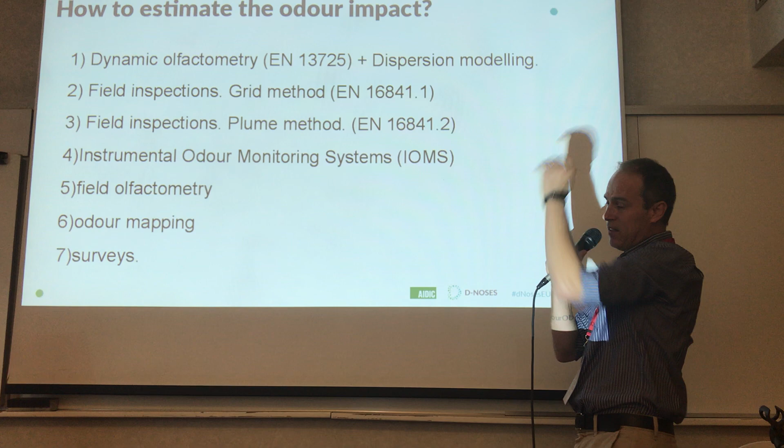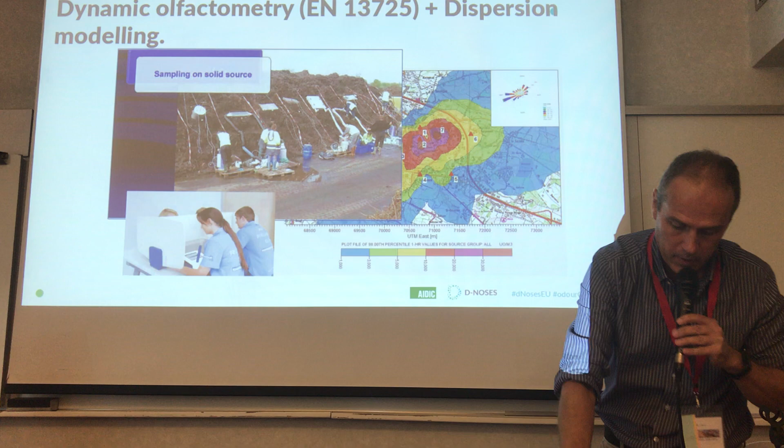Okay, so how to estimate the odour impact? We have seen this already explained by Laura and Andrea. So the first method is dynamic olfactometry coupled with dispersion modeling. You take a sample, you analyze it, and then you calculate the impact with dispersion modeling. This method is the most used.

It's repeatable, reproducible, but it has two things. It has a few more things, but I wanted to keep it simple. Two important things for me. One of them is the difficult estimation of odour for large passive surfaces, and the other one is the difficult estimation of fugitive emissions.

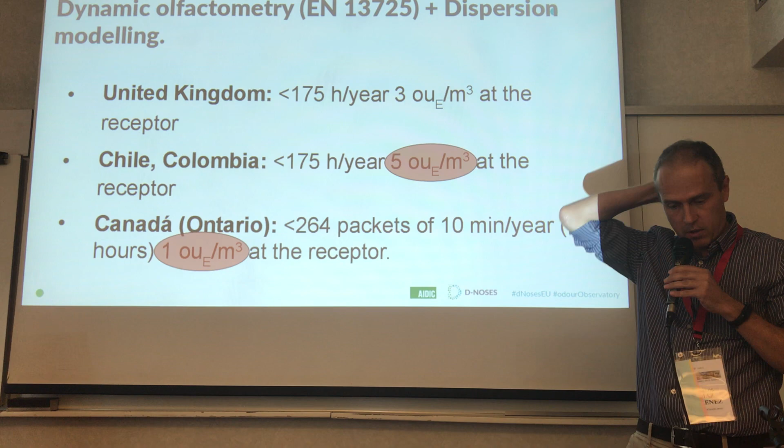So as you can see, we have had a lot of discussions, and still we couldn't reach any agreement, but the fact that we are doing this paper has meant that I have to present this many times. You're even leader of a task group about that in the project, so... okay, we'll speak about this. So this kind of methodology is being used a lot, but I wanted to present just three things. 4 minutes.

These are different countries, and they have different levels, and you can reach this level at different times of the year. In this case, 175 hours a year. We could speak about percentiles, but because this is a basic level course, I'm gonna speak about the number of times that you can exceed a certain concentration. So instead of speaking of percentiles, I'm gonna speak about the number of hours.

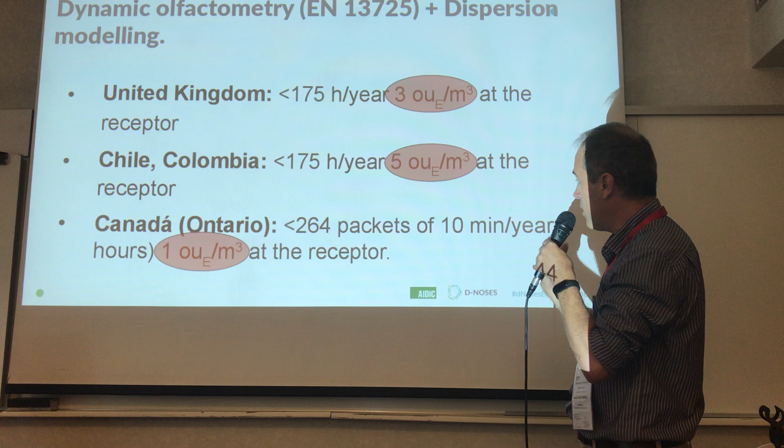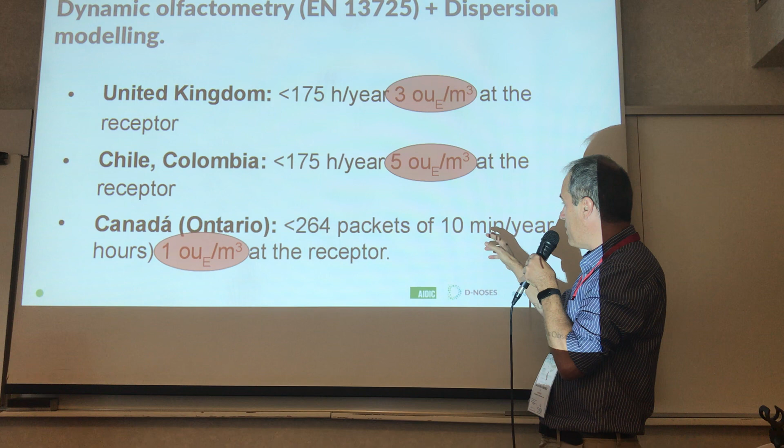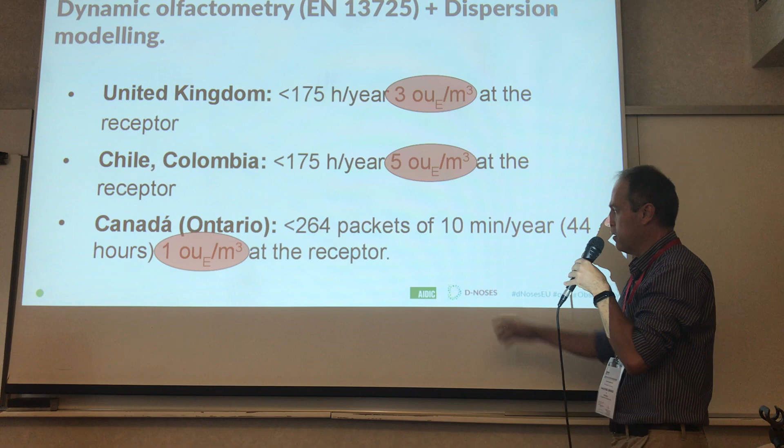Sometimes it's more graphic. And in Canada, it's around the same, but instead of taking hours, they take packages of 10 minutes. So it's 264 packages of 10 minutes in which you cannot go above one odour unit per cubic meter. This is every year, so 44 hours every year.

Andrea also spoke about this, but there are not many legislations about this. Using the field inspection, there is legislation, but so far I just know the German one, and in this case you cannot go over 1 odor hour more than 10%, more than 876 hours every year. You cannot go more than 1 odor hour if you are in residential and mixed areas. And you cannot go more than 1,314 hours a year if you are in commercial and industrial areas.

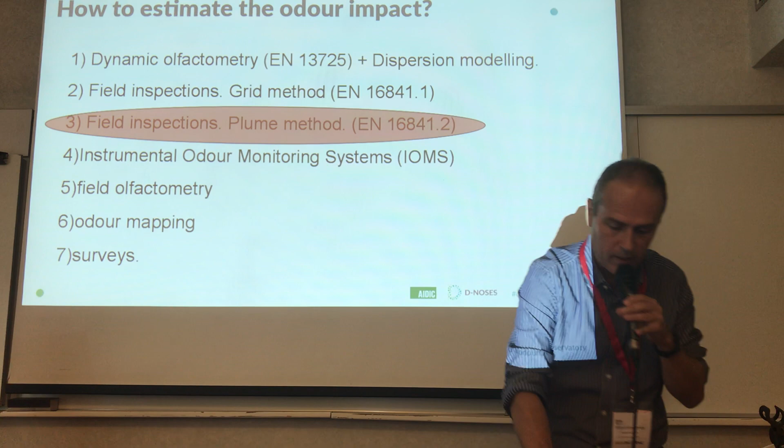The grid method was already explained by Andrea, so I will not go there. You go to the source, the stack, and you move. I actually like the plume method more, so this is the one that I usually explain. There are some arguments about why I like it. Some other people would like another one. Anyway, this is the source, smoke there, and you go in the zigzag.

Not this way, but like that. Yeah, you seem drunk. Not this way.

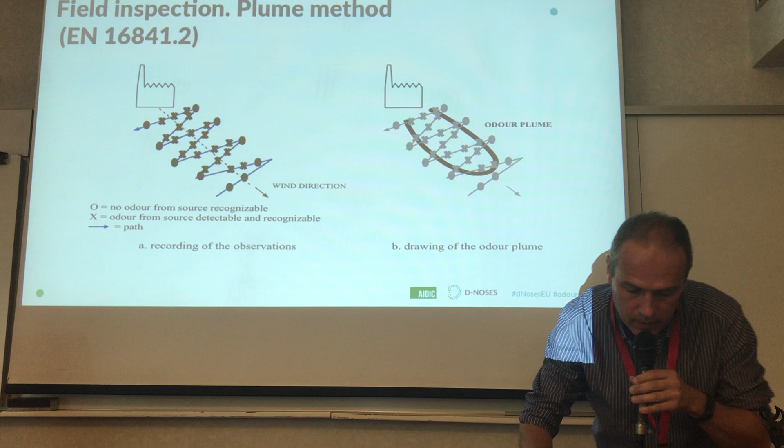And you measure a unit which is not the other unit. It's the sniffing unit.

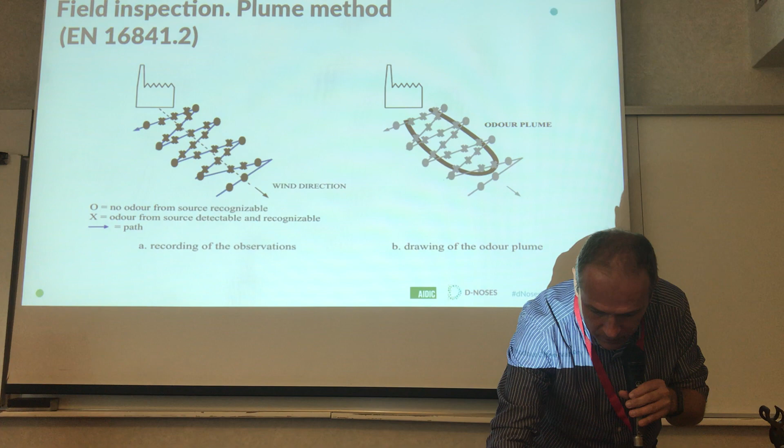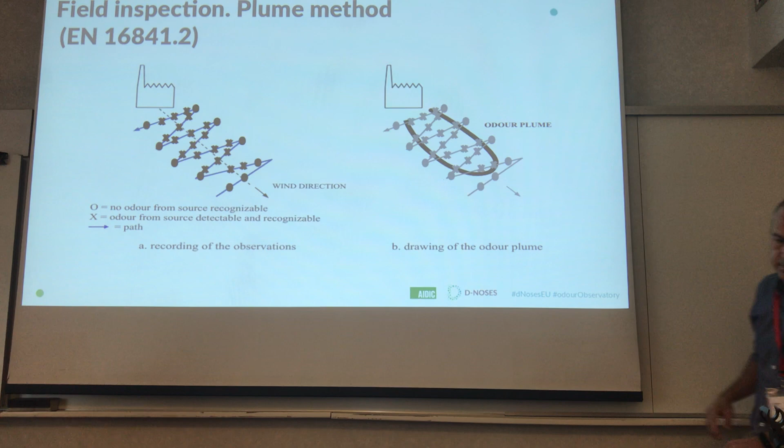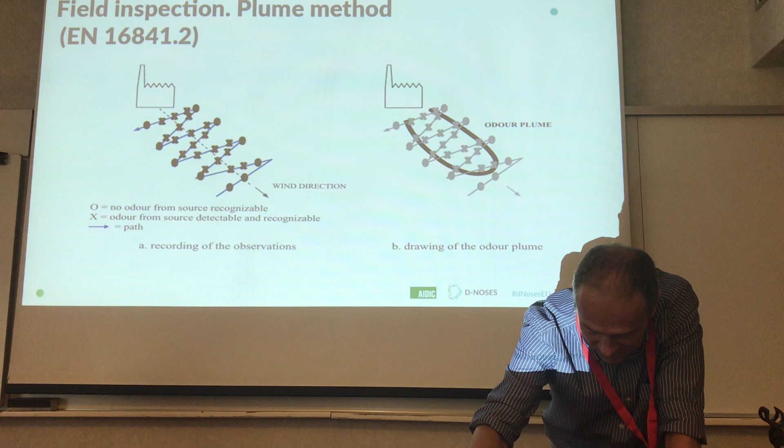Got blocked. So nice. Moment. It's blocked. It's blocked. If you have any questions, it's a good moment for questions.

Yes. They are asking to explain the odor hour, which in fact was not explained. How to calculate the 1 odor hour in squares? How do you go in the grid? It's when odor is perceived for more than 6 minutes in the hour. Yes, it's like this. You go to a point, right? And you stay there for 10 minutes. With the new European standard it changed a little bit.

And now you smell, right? And then you detect whether it smells or it does not smell. Then after 10 seconds, you breathe again. Smells or not? After 10 seconds, you breathe again. Smells? No. And every time you detect a smell, you check yes. So after 10 minutes, if 10% of those measurements are positive, this counts like a positive register, like 1 odor hour. One 10-minute measurement with more than 10% counts like 1 odor hour.

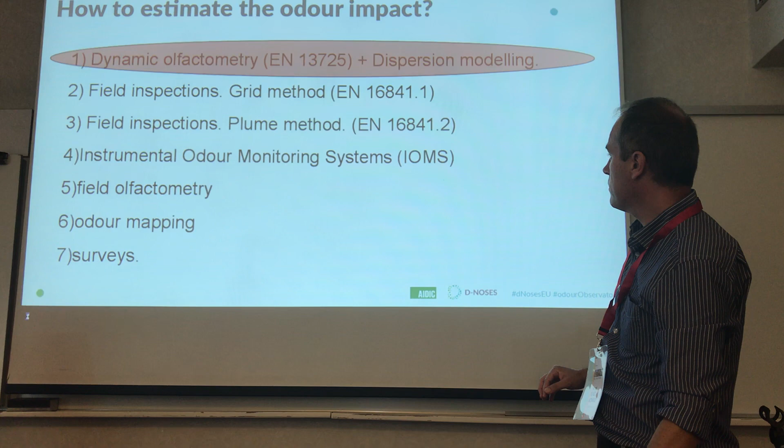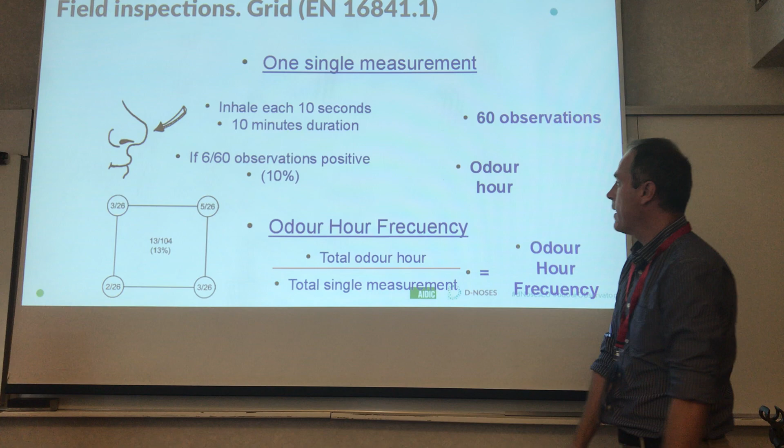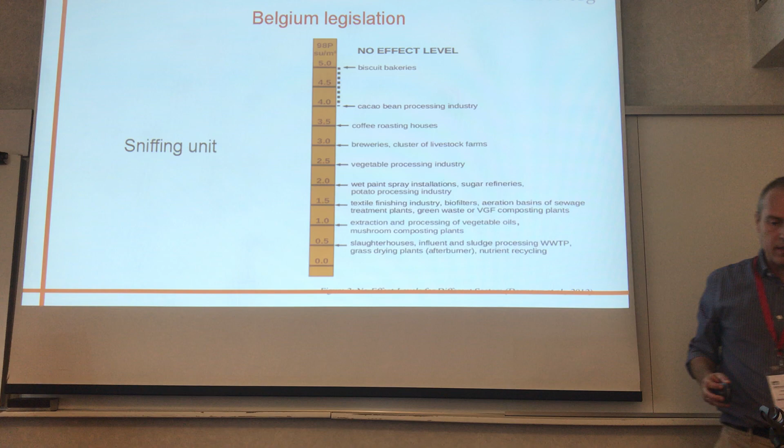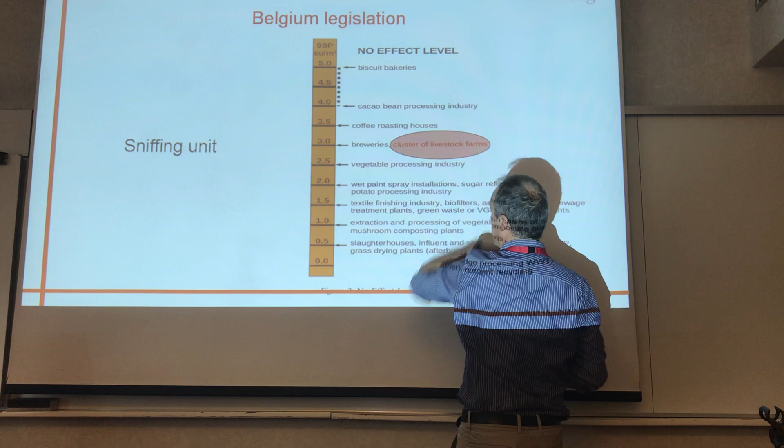Field inspections. So in the field inspection they measure the sniffing unit. The sniffing unit is regulated in the legislation in Belgium. For example, I took the example of livestock farms. There is a sniffing unit level of 3 sniffing units. There are target and limit values for this kind of measurements. For example, for slaughterhouses, there's a limit value of 0.5 sniffing units per cubic meter as 98 percentile.

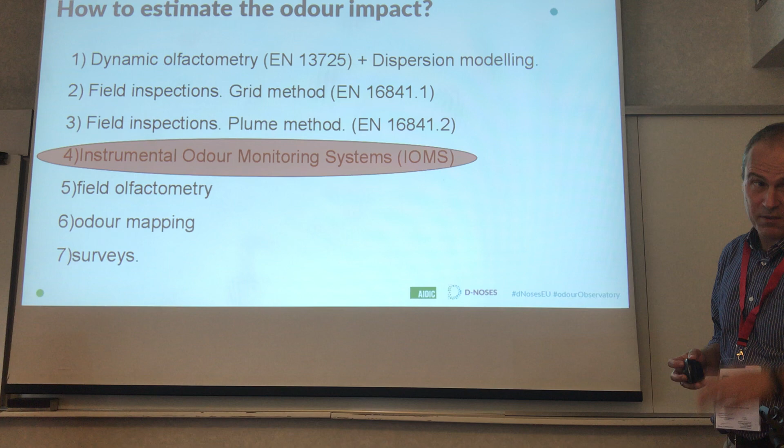Just these type of limits that are evaluated with the theoretical model, in practice, how is it possible to measure? That's another conference of 1 hour more or less. Next time when we meet.

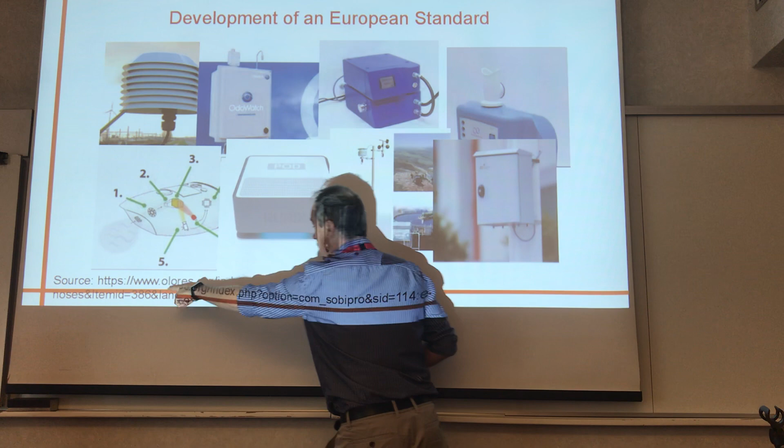Instrumental odor monitoring system. That's the old e-noses. This is a new European standard. I think if you want to buy e-noses, I would go here to olores.org. It's the website that I'm main editor of, but there are a few more. I just got no space for more e-noses, because I remember in the USA 3 months ago somebody told me, oh, there is just OdoWatch or whatever. And I said, no, there are a lot of e-noses, or IOMS as we call it now.

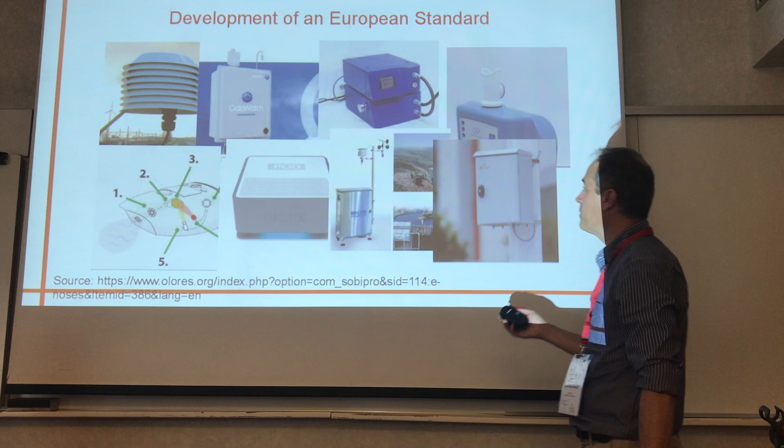So for IOMS, there is a legislation as well. There's a legislation that considers if you have an instrumental odor monitoring system, the so-called e-noses, or not. For example, for animal byproduct processing plants, there are emission limit values of 5 odor units per cubic meter. Those limits are not set at the receptor. You have to get this limit 3 kilometers around the fence. So it's a bit different than usual.

And depending on new plants or existing plants, this limit can be exceeded 44 hours a year for new plants. And if you have an existing plant, you can still go for 175 hours a year. And you would tell me, where are the e-noses here? Where are the IOMS, the instrumental odor monitoring systems? Okay, so these plants have to regularly check their emissions.

And if, for example, all the odor emitted is over 100,000 odor units per cubic meter, they have to, every 3 months, take an olfactometric sample to check if this limit is still being met. But if you have an IOMS, Instrumental Odor Monitoring System, so-called e-noses, you can have a longer period, and instead of checking every 3 months, which has a high cost, you can do it annually.

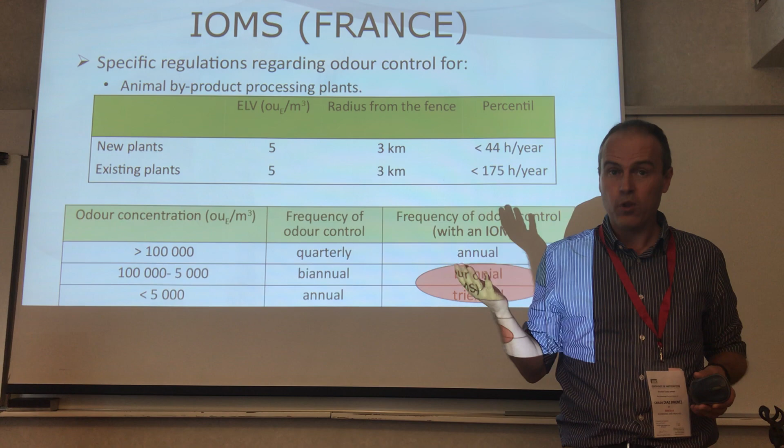Or if your odor concentration is between 100,000 odor units and 5,000 odor units, you have to check your emissions twice a year. But if you have an IOMS, you can do it every 2 years. So sometimes, because the olfactometric analysis can be expensive, this is a way to sort it out. And this is the only legislation that I know. If somebody of you knows any other legislation that has anything to do with IOMS, please let me know.

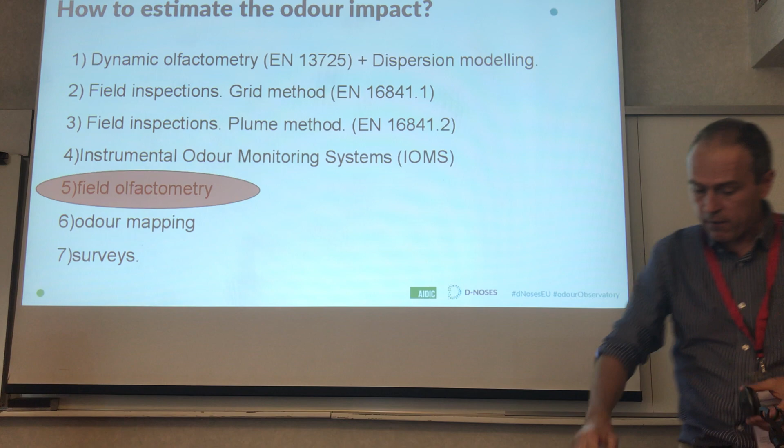Carlos, is it limited to animal byproduct plants? Mm-hmm. Just that.

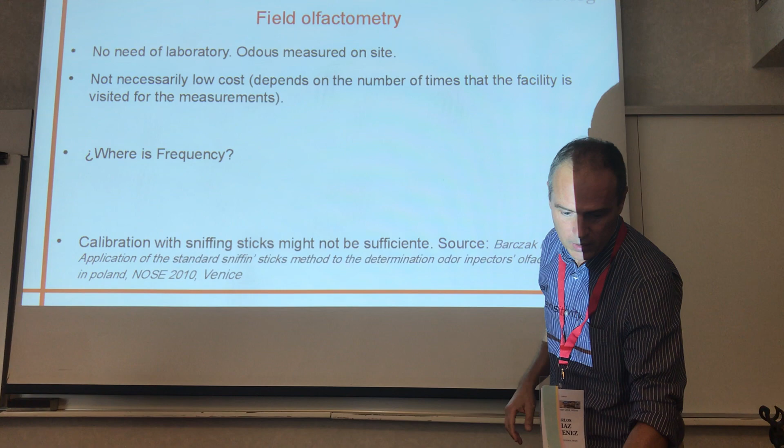There have been a few studies between this model and this model, but I will not go into those. I just wanted to tell you that, first of all, it's not part of the standard. I wish one day it is part of the standard, because I think it would be a good thing. So far, it's not. There is no need of a laboratory, so odors are measured on site. Sometimes it's not necessarily low cost, because sometimes you have to go a few times to the place, and if the place is far away, you have to spend a lot of money there. So it's not always the cheapest option to measure odors.

It's very difficult to measure frequency, because you have to go many times to the site. And calibration of panelists with sniffing sticks might not be sufficient. And here you have a reference of a study comparing panelists calibrated with butanol and with sniffing sticks.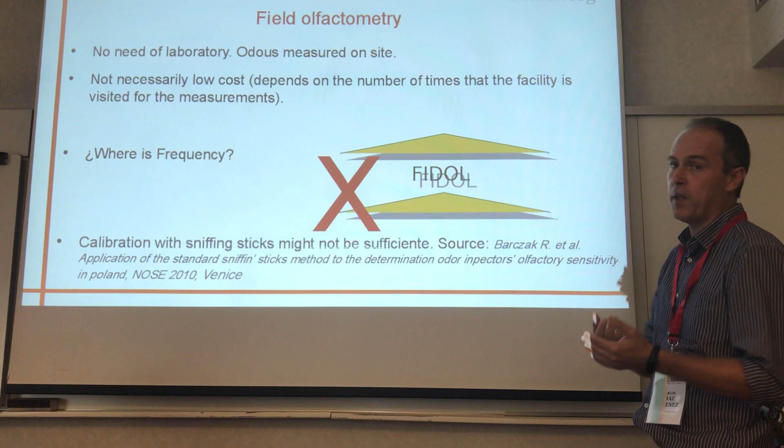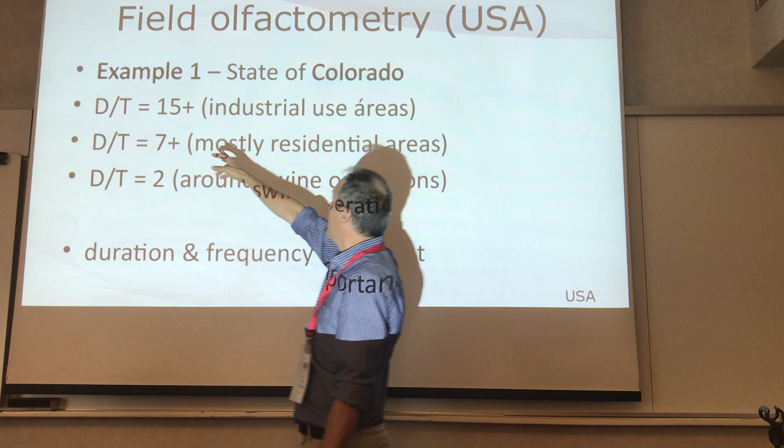Anyway. Is there any legislation that relates with field olfactometry? There is. Most of them are in the USA. For example, I put the state of Colorado as an example. You have dilution to threshold. It's not odor units. For example, for industrial use areas in the state of Colorado, you can't go over 15 dilution to threshold. And there you have other limits for other activities.

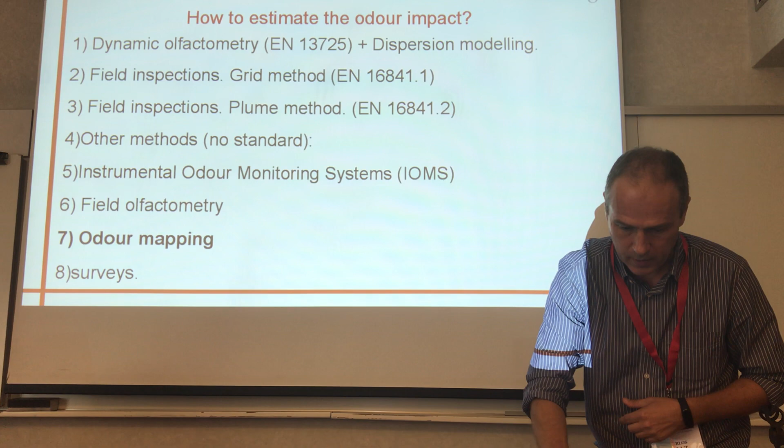Now, odor mapping. Odor mapping is what we are going to do at the D-NOSES citizen science. I have always called it odor mapping, but because I now know Rosa, I'm changing my language a little bit. Now I'm calling it citizen science, but it's exactly the same. It's using the people as a tool to measure the odor impact. It's a very interesting tool.

A tool that needs citizen participation. It's very easy to validate, and it's very easy to detect false positives. It's very easy to detect people that are not saying the truth. Very easy. So it's not subjective, it's objective. And it's the only technique I have mentioned here, and I have 10 seconds to finish, that links odor with annoyance. We haven't spoken about annoyance until now. It's the only technique that links odor with annoyance, as Rosa mentioned this morning.

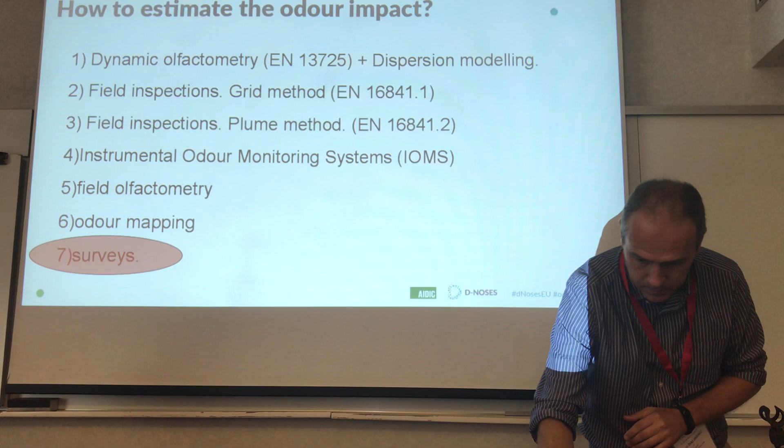And I put this last thing, the surveys. They are also used a lot by managers, and they are useful. There are 2 types: repeated with a certain periodicity, or made just one time, when you send the survey to your group of interest and you ask them. Useful when you want to identify nuisance, but it doesn't say when and where, because you send the survey or questionnaire on one day, and you might have odors or you might not. The person that received this questionnaire does not know if a week ago there was another. He has a feeling of his normal day-to-day. Good for a general evaluation and very useful for health effects studies.

2 things, fast. Good news in Europe, because we have the first odor emission limit for 28 European countries for the very first time. So our working group 2 will have a new status because there is legislation, European legislation. And if you realize, in the whole talk I haven't mentioned odorants. I didn't say anything about hydrogen sulfide, I didn't say anything about ammonia, I didn't say anything about VOCs, because I was talking about odors, not about odorants. So thank you very much. If you need anything.